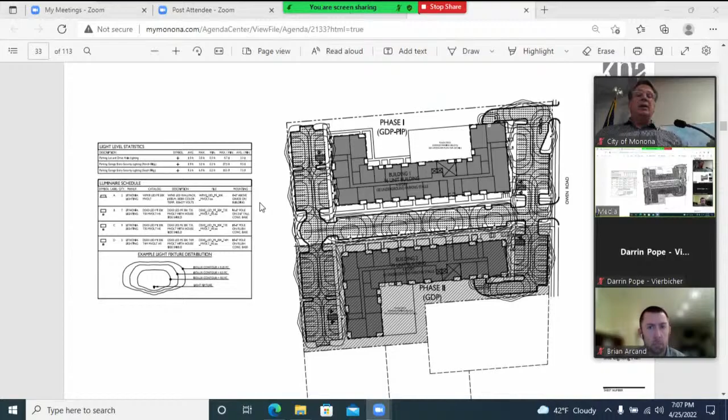Civil engineering has continued to develop further. A couple of things to point out within the site: we do have underground parking below the building, accessed from the side of the building, and then phase 2 from this side. The site for phase 2 is the existing post office building. So once phase 1 is completed, the intention is that the post office has the potential of moving across into the commercial space here, which would then free up this site for phase 2 construction.

Within the site, we have access to the underground parking. It goes out—let me back up. The underground parking extends beyond the footprint of the building, out to the side here.

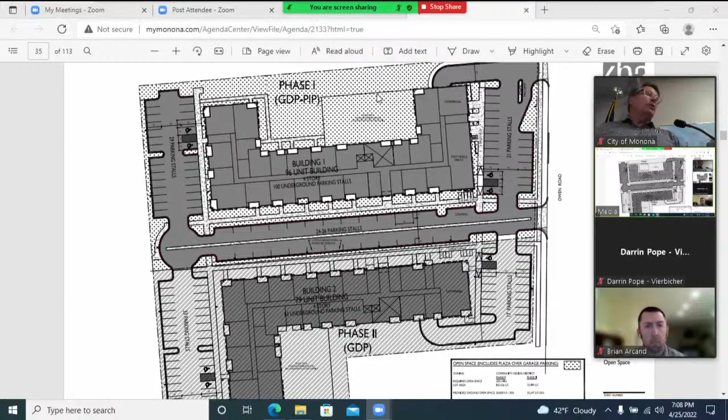Instead of having just a concrete block building, we're taking advantage of that as outdoor patio space, which we'll get to in some of the views. I'm going to scroll past the civil engineering drawings and get to the renderings.

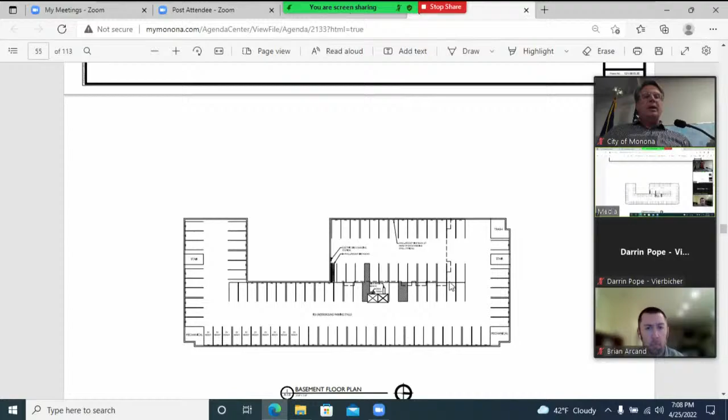So here we go, first basement level plan. Again, the footprint of the building above the 4-story portion extends in this C shape, and this portion is what extends out beyond the footprint of the building.

Second and third floors are identical in layout. Then on the 4th floor, you'll notice we've stepped the building back. That's done intentionally to reduce the scale, remove the feeling of the building being just an extrusion, add some interest to it, create these outdoor patios, and make it more interesting. That, coupled with the forms and changes of materials, really adds some dynamic to the building and more of a neighborhood type feel.

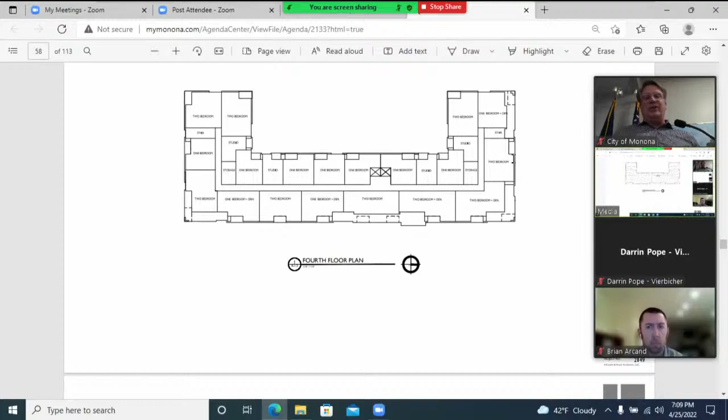And then this is actually the phase 2 building, which, if you don't mind, I'll just skip past—we're not asking for PIP on this. And I'll go past the black and whites.

So then the exterior materials: a combination of brick and composite sidings, like a Hardie type siding. We do have a wood grain look, which is the brown color, as well as a painted version, which is more of a gray type.

So black composite windows, aluminum storefront, black railings—real nice, crisp look to it all, very contemporary feel. Useful life on that composite siding is 30, 40 years easily.

And then just a portion here where we'd have the underground parking entrance. So we are recessing that down, and that'll be hidden.

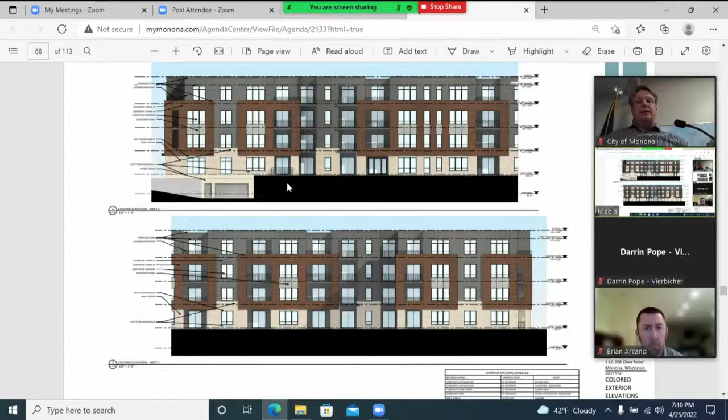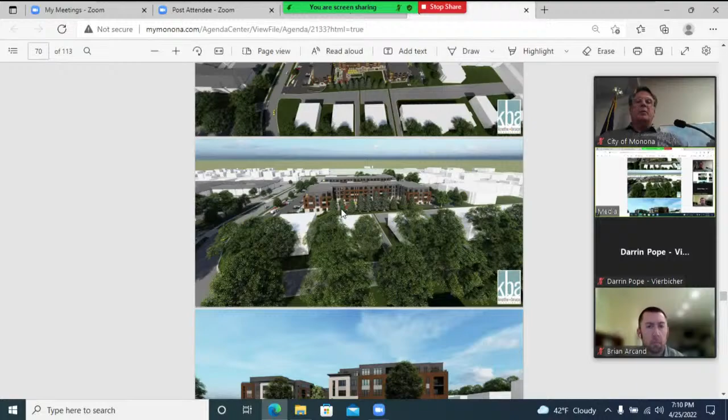And a couple of aerial views. Along the side of the street, we are proposing some higher density trees just for some screening and privacy. The landscape is quite generous—it's beautiful, creating kind of a streetscape along it with the boulevard trees.

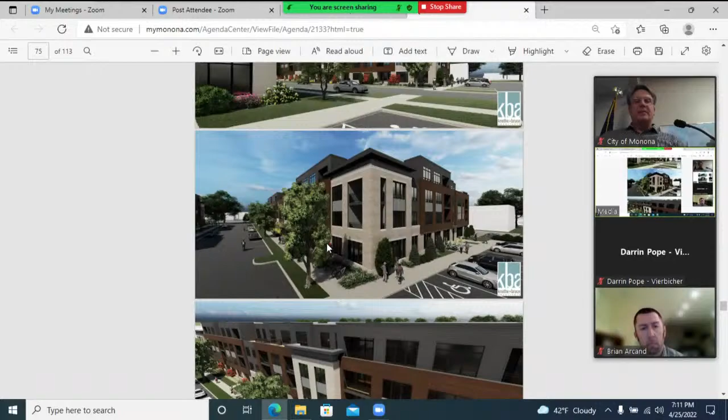Accenting the corners with masonry, rich materials really anchor the building. Again, that stepping of the form—not just in the materials, but the physical stepping back of the building—creates these outdoor patios up on the 4th floor, reduces the scale of the building, and makes it more of a human approach. The units will all have balconies or patios.

And then here's a view from that interior courtyard. The intention is that we'll have some seating areas, barbecue stations, bocce ball, a bags area—again, promoting a bit more private outdoor activity space. It is shared by all people within the building.

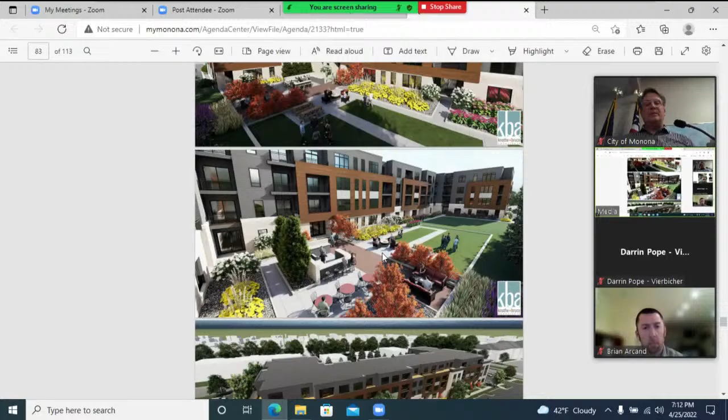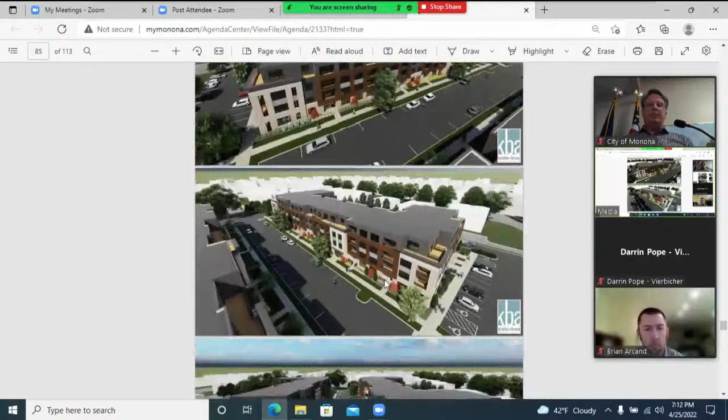Another view of that. We also have a dog run in the back—it's very popular. And between the phases, we are proposing a shared drive with parallel parking. There's a view of it: phase 1, phase 2, and a view looking down that shared road.

Are there any questions?

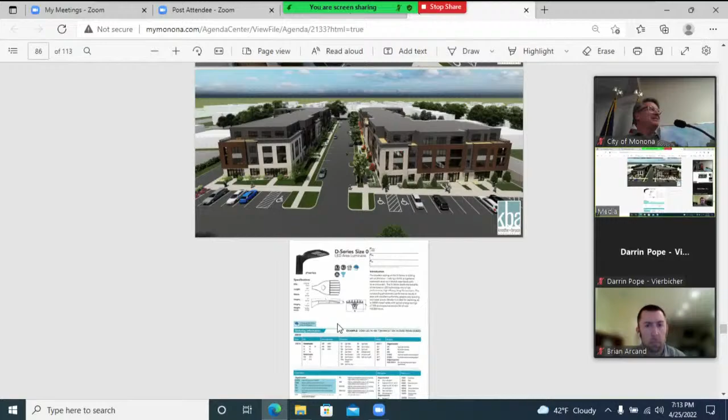No, I'm sure the commission will have questions, but on the detail—I appreciate you taking the time.